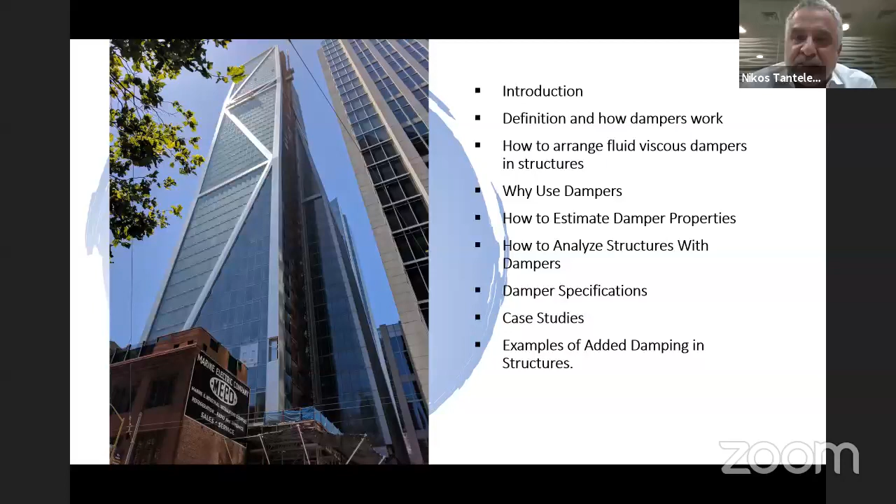Then we'll talk a little bit about specifying dampers, how dampers are generally specified on a project, and then we will see some case studies.

Just before we start, a little bit about Taylor Devices. Taylor Devices is one of the pioneers of shock control and vibration in the world. They are based in the United States, in Buffalo, New York, and were founded in 1955. They are organized along three verticals: aerospace defense, industrial, and structural engineering. The technology we'll discuss today has its origins in the aerospace and defense industry.

First we'll see how dampers work. To make this abundantly clear, we are going to go a little bit in a somewhat convoluted path. First we'll see photos of what fluid viscous dampers are and how they work within a structural system.

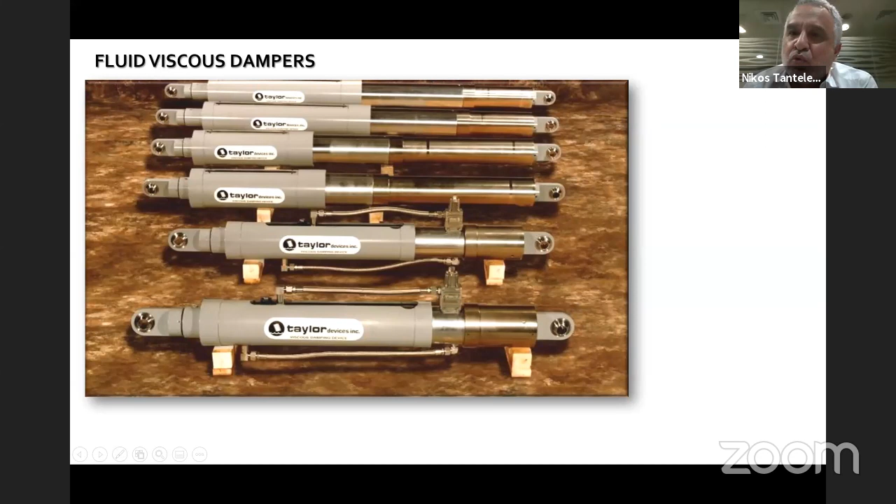Like they say, a picture is worth a thousand words. So this is a picture of what a fluid viscous damper looks like. It's basically a piston, a shock absorber, connected on the structure on two ends. It's a linear device which takes advantage of relative movement between the two ends it's connected to.

Now we're going into more detail. This is a cutout of a typical damper. As you can see, there is a piston, a piston head assembly which is perforated with orifices. Through the movement of the piston, driven by the relative deformation of the two structural points to which the damper is connected, fluid is displaced from one chamber to another. This achieves generation of a damping force.

You all remember your single degree of freedom dynamics model - it generates a damping force, which we will expand on later. It's worth noting that here we show a typical Clevis connection. There are other types of connections as well which can take care of irregularities in the connection or tolerance issues. I want you to note this green color thing, which is a cap and seal.

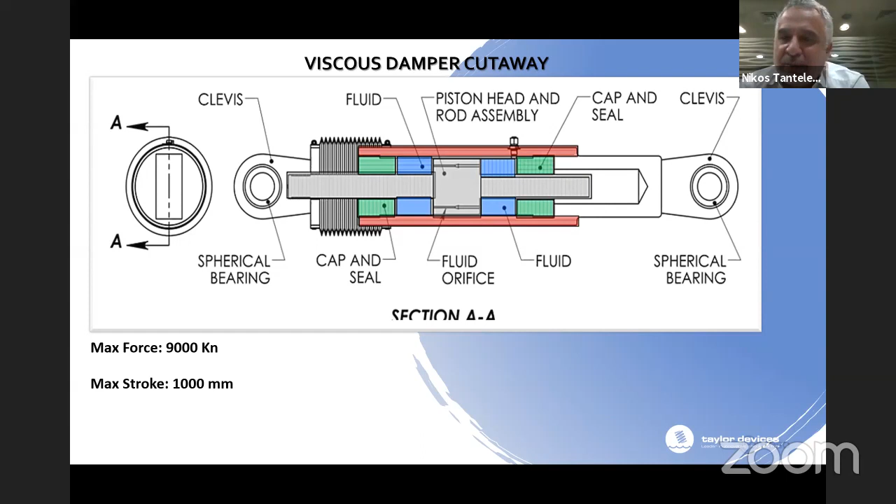This is a typical damper. The next one I'll show you is not typical, and I'll explain why. On a typical damper, these caps and seals are usually structural polymers, if you are talking about a good quality damper. Taylor Devices has patented structural polymers which are used in fluid viscous dampers. On this type of damper, the maximum force that can be generated is about 9,000 kilonewtons, and the maximum stroke is 1 meter.

This is very thin metal creating an accordion-like structure. This obviates the need for polymers or elastomers. This damper does not contain any synthetic elements - it's just metal. It was designed that way to be used; it was initially conceived for space applications, but now it's used for wind applications, because in wind applications we have many low amplitude cycles which create the need for reliability.

A structure will go through billions of cycles of wind vibrations in its lifetime, and this necessitates a system with reliability. Fluid metal bellows dampers are basically designed for infinite life. They are guaranteed for many years, 40 to 50 years - they are warranted and designed to basically last as long as the structure. But the maximum force here is limited to 2,500 kilonewtons and the stroke to 0.5 meter.

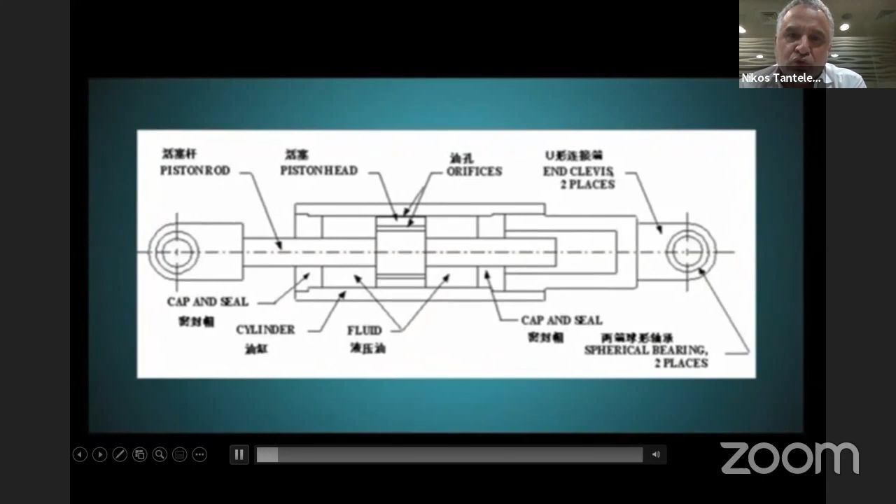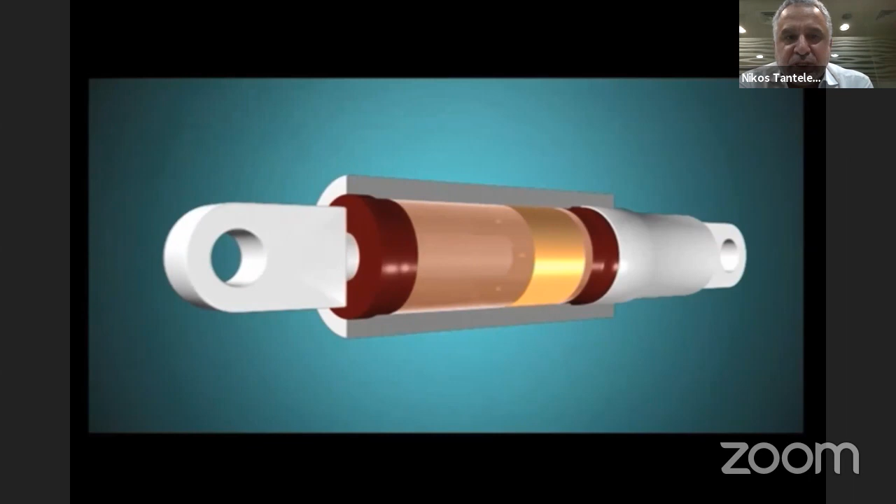Now I'll show you a video which makes what I described before clearer. You'll see the damper in operation. The movement you see comes from the structure - it's basically relative movement between two ends. Let's say between the top of a story and the bottom of a story, as you will see later.

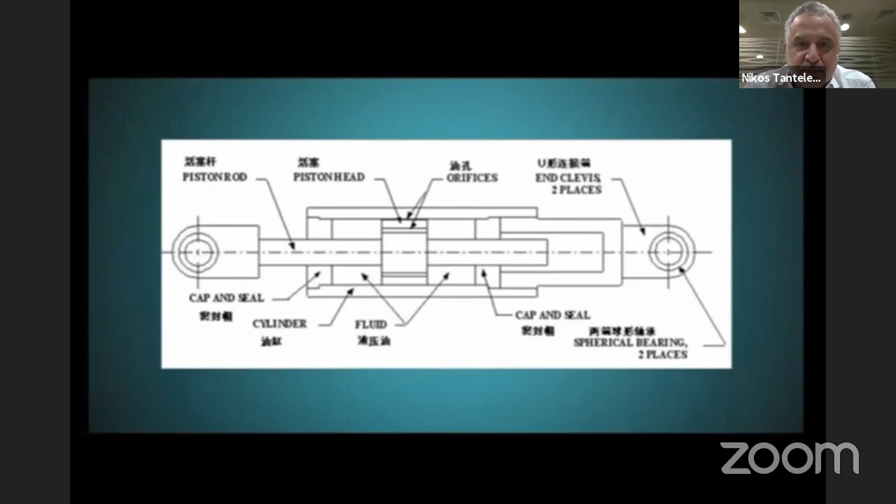Before we go further, we should describe what is a constitutive relationship for a damper. How does it work? We know visually how it works, but what parameters make it work? The basic constitutive relationship in simple terms for a damper is what you see here on the left.

The damper generates a damping force. This force is equal to a damping constant called C, which is characteristic of the damper. A damper is designed to have a specific C, a specific damping constant. It's also proportional to the velocity of the motion, which we'll see later, relating to the movement of the structure - basically the relative velocity between two ends raised to an exponent alpha.

Alpha can be set to any value from 0.3 to 2, but usually, and this is something we select from the beginning - this is also built into the damper through the damper's design - but it's something we select during the preliminary stage, on the basis of experience and certain special characteristics of the application.

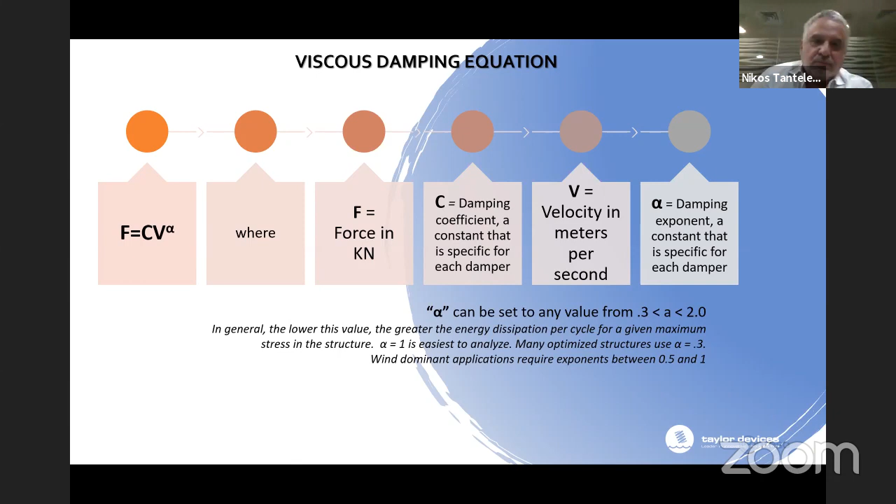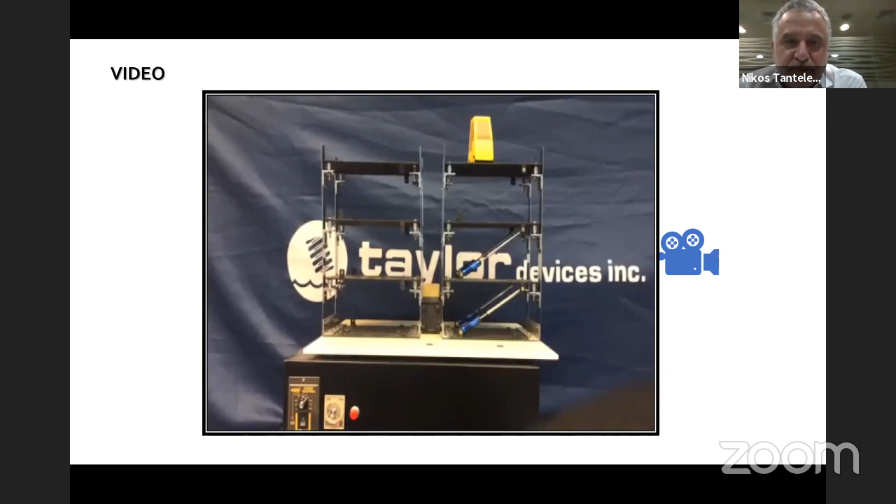Now we're going to look at how to arrange dampers in structures. This is a schematic that shows typical story arrangements. There are other types of arrangements which we will see later, but these are typically installed on bay frames and take advantage of the differential movement of the interstory drift.

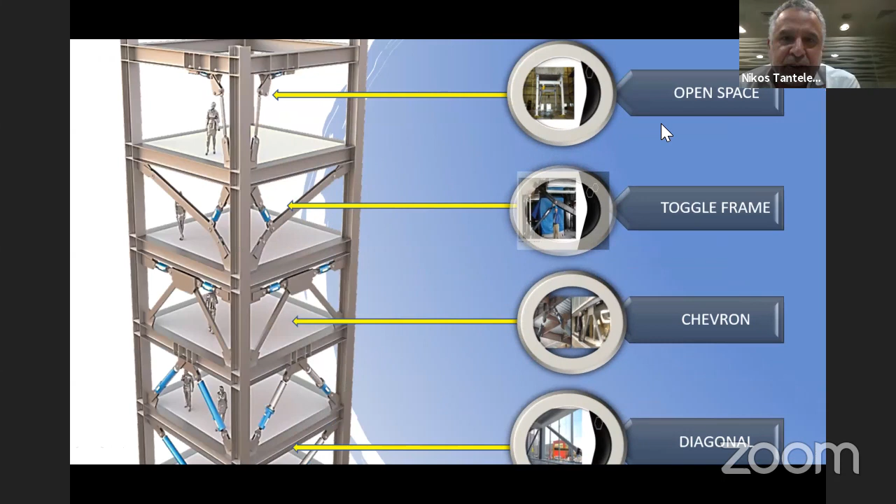One recent development is the toggle application, which has the benefit of being able to amplify movement. Basically, this kind of application multiplies the movement in the damper three times in relation to the differential displacement, the interstory drift.

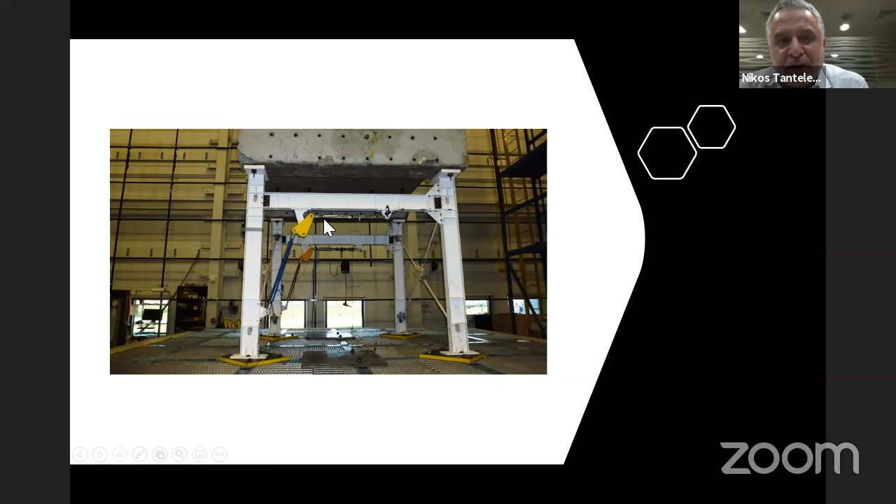This is the open space application. It's a new development which allows basically using the damper in a horizontal position, but without obstructing space. The one to the left is a double diagonal arrangement.

And this also has a different magnification factor, which we'll see later. Basically, the movement in the damper here will be the interstory drift times cosine of the angle theta of the incline of the damper.

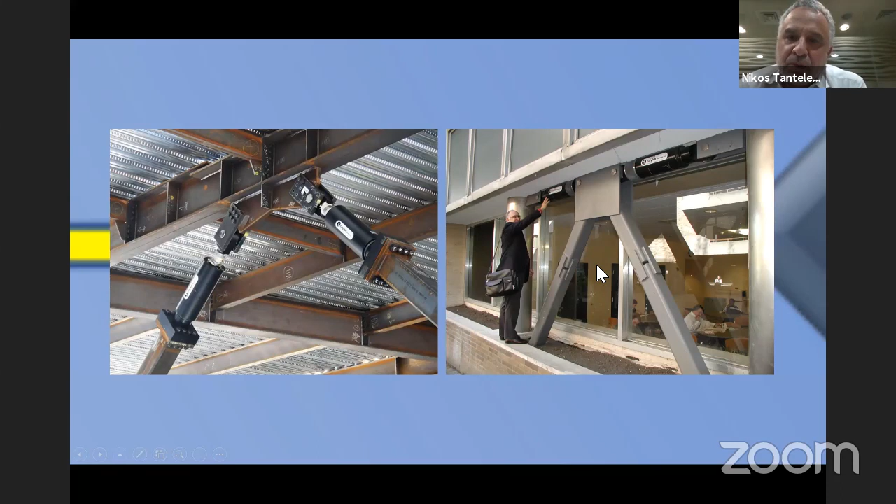This is called the chevron arrangement. Here to the right, where the gentleman is standing precariously, is the chevron arrangement, and this has a magnification factor of 1, i.e. the movement in the damper is the same as the interstory drift. And this is a classical diagonal arrangement.

This is another application. Sometimes dampers are used in conjunction with base isolation, in addition to lengthening the period of the building with the base isolators, to also impart substantial amounts of damping. This is used in highly seismic areas like California or Latin America.

This is called the mega brace configuration. If you look at the schematic on the left, the rendering, basically this is a configuration whereby the dampers are placed along a long external brace. We'll see a case study later where the brace traverses 20 floors and basically makes

up the lateral system of the building. The advantage of that is being able to collect movement over multiple floors and thereby optimize the behavior of the damper. This system has been used in a few very notable applications, like 181 Fremont Street in San Francisco, California, which we will examine later, and the Torre Mayor building in Mexico.

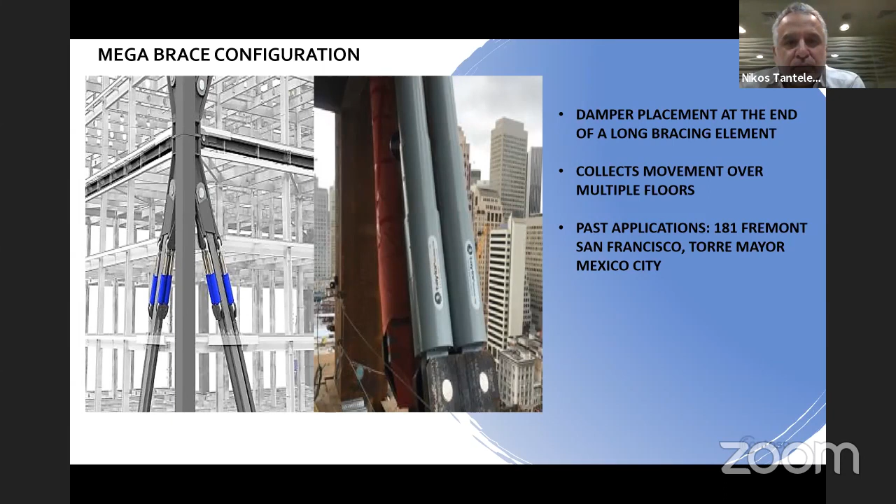And I think the most important configuration for our area, where we have basically wind dominant applications in high-rise buildings, is the damped outrigger. The outrigger system is a well-known system to structural engineers, and it basically consists of connecting the core, as you very well know, to the perimeter frame through a stiff member or system of stiff members to transfer moment, to convert moment into compression, to avoid dishing and to reduce the moment of the core.

Here, what we do is we decouple the outrigger from the column. It's no longer a stiff arrangement, it's just a lever arm, which transfers the relative movement between the core and the perimeter into the damper. It's ideal for high-rise buildings that have mechanical floors, where you can have these arms, like an outrigger, though it's not really an outrigger, to operate in that way.

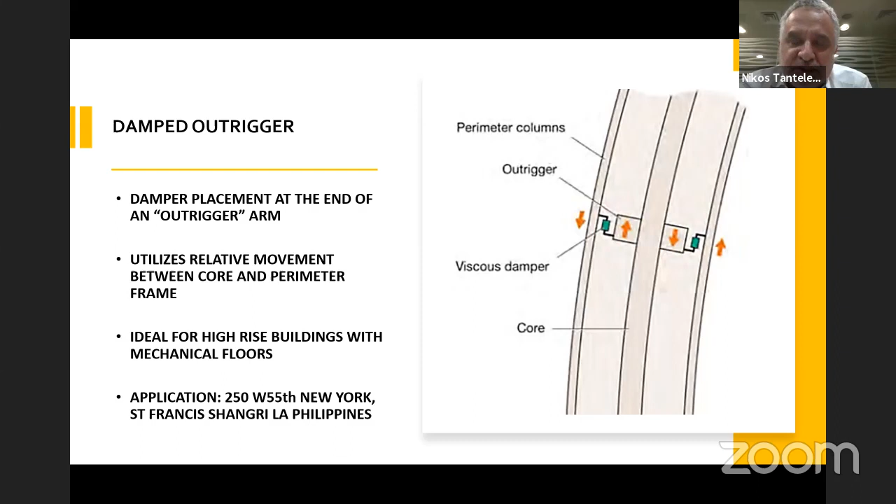Typical applications of that are 250 West 55th in New York, a 40-story building, which you will see later, and the St. Francis Shangri-La in the Philippines.

This is a close-up, a better representation of the damped outrigger. You see the core here. You see the outriggers, and you see the outrigger-to-column damped connection.

And this is what the actual connection looks like. On the left, you have a perimeter column. On the right, this is the edge of your outrigger, which is outrigger in quotes - it doesn't work as an outrigger, it's just a lever arm. In the middle, you have the damper, which is connected to both members. Here you see the typical bracketed connection.

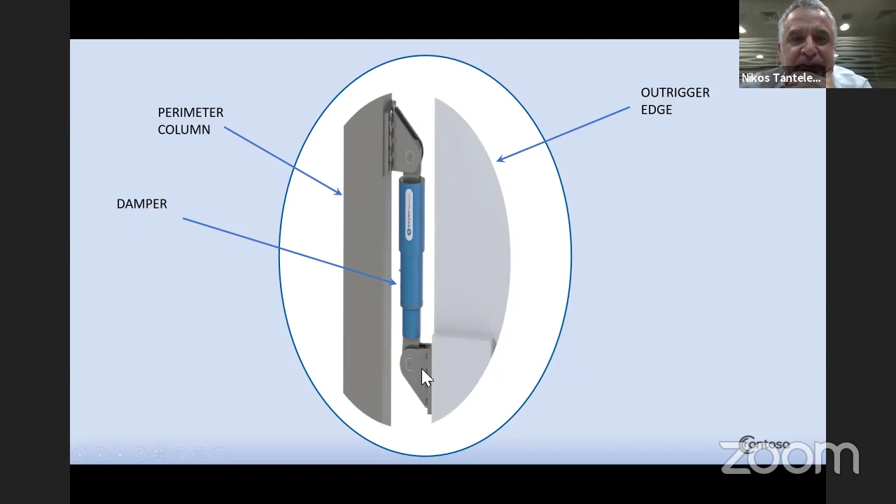So now we have to see why you use fluid viscous dampers. So the fundamental questions to answer in this discussion are two fundamental questions. Why do we need supplementary damping? Because this is what dampers give us. And if we need supplementary damping, why use fluid viscous dampers in particular? So we will attempt to answer these questions.

Just a few central ideas that are going to be pervasive through this discussion. For a damper to be a useful addition to our arsenal, we have to have two things. We have to have dynamic response, because this is how a damper works. And we have to find points that have substantial relative movement, when I say substantial, it depends on the application. For wind, it could be 5 or 10 millimeters. A substantial relative movement, which we can connect the damper to those two points, and have the damper operating efficiently.

And obviously we'll reinforce the idea, which I'm sure all of you know, that when we have to deal with dynamic response, we have two options. We can either stiffen the structure or dampen the structure. Dampers can be used for both SLS, drift, acceleration, or to reduce strength demands. But we can optimize for one. It will help the other as well, but the optimization has to be on one of the two categories.

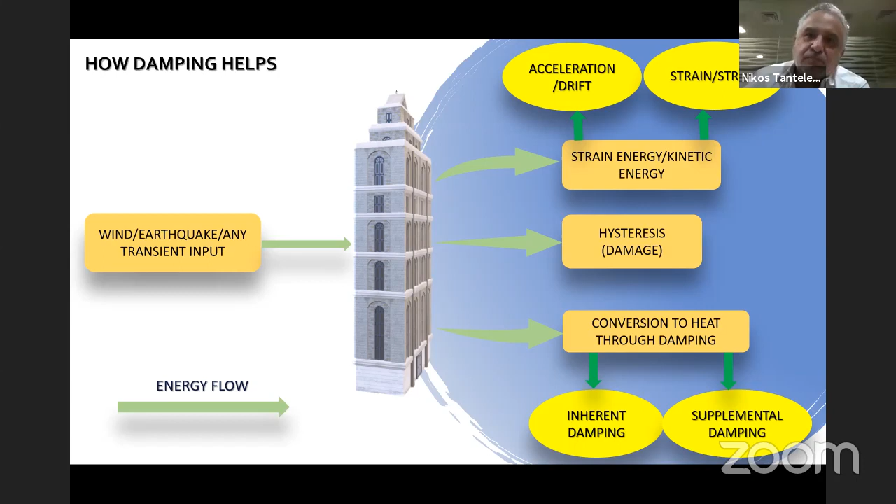Okay, so since we have two major sources of dynamic input, of course we have others as well. We have blast, we have many others. But the two major ones are earthquake and wind. So I thought to answer the question of why we need damping through these particular categories.

In the first picture here, we see a typical family of response spectra for earthquake. And these response spectra are obviously not smoothed out design spectra, they are spectra generated by a specific ground motion. But you can see the obvious, which is basically stated in codes as well, in the ASCE code chapter 18, where you have response reduction factors. And the fact is that with damping, you reduce the spectral responses of the structure.

You will see here that, for example, at a period of 0.5 seconds with 5% damping, you have almost an acceleration of 1.2g. And if we go down this curve, at 0.5 seconds with 40% damping, your spectral acceleration has dropped to 0.4g. So this behavior speaks for itself, it's basically that damping reduces dynamic response.

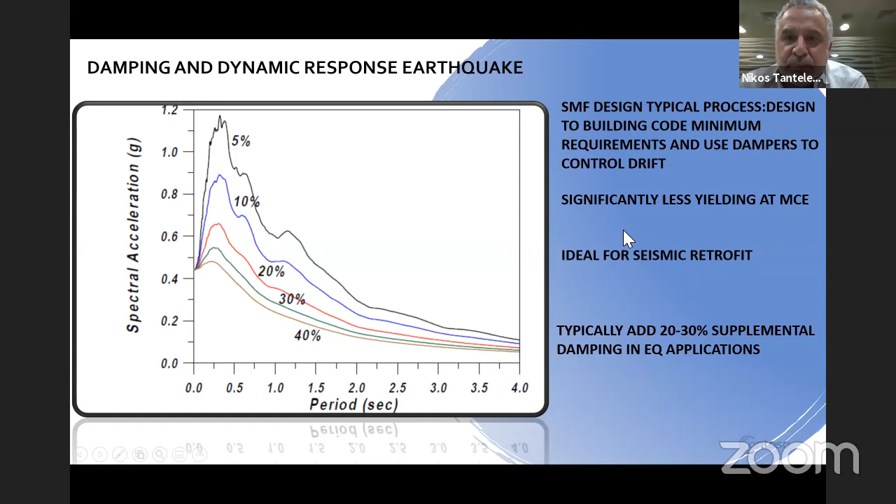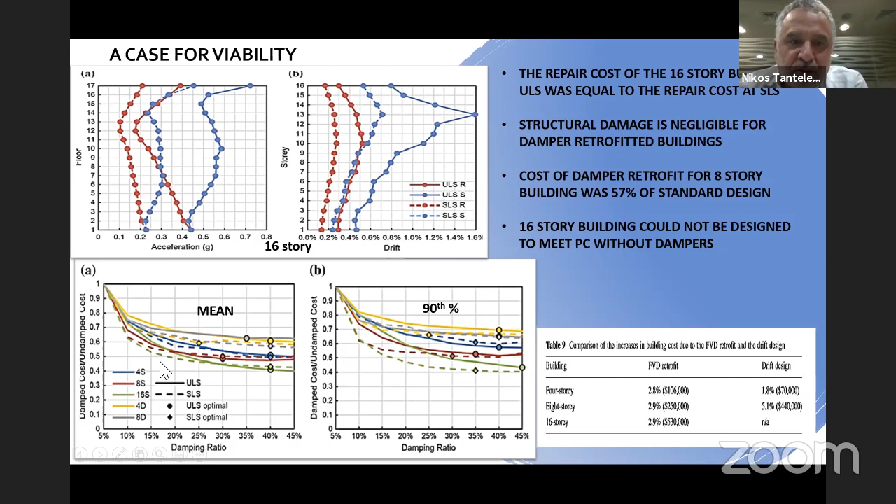But if we look at the corollary, if we allow for the same deflection, same drift, same behavior, that means you can reduce the stiffness of the building and have the same identical behavior as a building that is undamped.

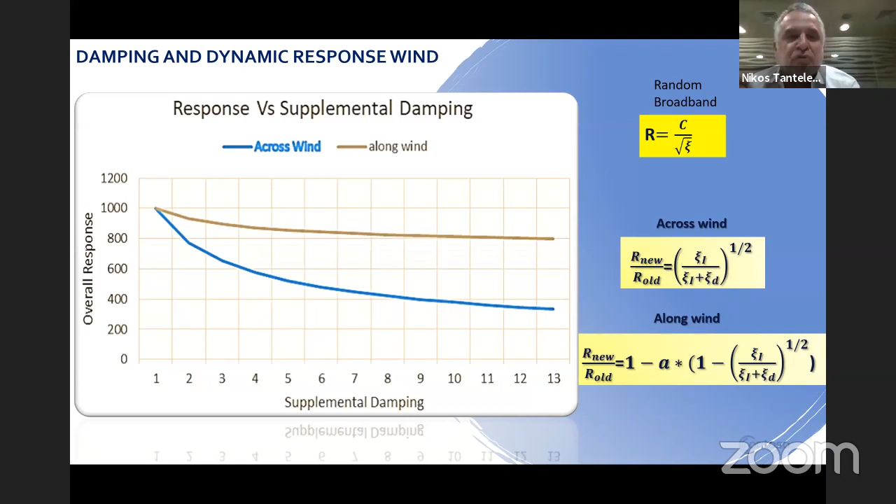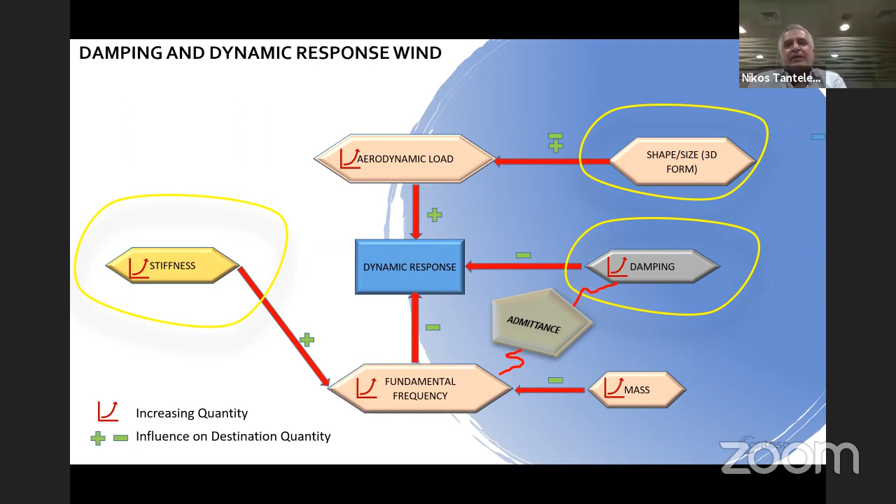That's another schematic just to drive the point home, regarding damping and dynamic response in wind. Once we have a given shape and size, the 3D form of the building, which also determines the dynamic behavior, we have basically decided and determined the aerodynamic load. Once we have this aerodynamic load, the question is how will the structure respond to it? The things that will influence the dynamic response are stiffness and damping. With increasing damping, we reduce the dynamic response. With increasing stiffness, we again reduce the dynamic response by increasing the fundamental frequency.

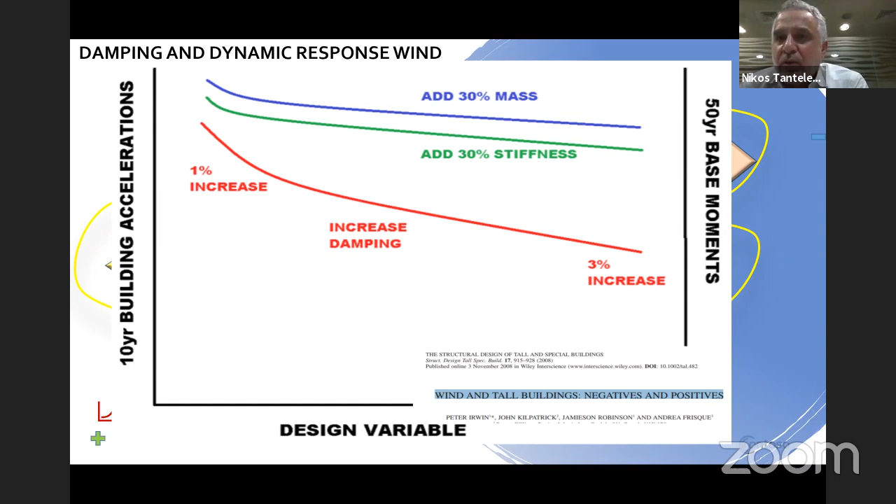I was asked a question: when is it inevitable to use damping? The answer is, you can always add stiffness, but stiffness means money. It means interfering with the elegance. And as you can see, the response reduction is not as sensitive to stiffness as it is to damping, which shows you that it's a more efficient way of taking care of dynamic response.

So in summary, now let's talk about why we need damping, and why we need fluid viscous dampers to give us this damping. They have several advantages, and that was the basis of our discussion so far.

It enables slender structures by dissipating energy in a predictable manner. The fact that it's a distributed system, you have a number of dampers distributed in the structure, creates redundancy. This allows the engineer to benefit from reductions in strength demand, so use it at ULS, not only to reduce acceleration or drift. They are easy to install.

Connections are straightforward. They are codified, included in international codes, the Chinese code, ASCE 7-16, and now there is a new ASCE pre-standard for design. There is an abundance of research, thousands and thousands of pages printed on fluid viscous dampers since the 1990s. They are very well understood and proven in 700 structures around the world.

And they are not dependent on frequency and temperature. The damped frequency of a building is related to the undamped frequency through damping, but the difference is minuscule. The most important benefit is that they behave out of phase.

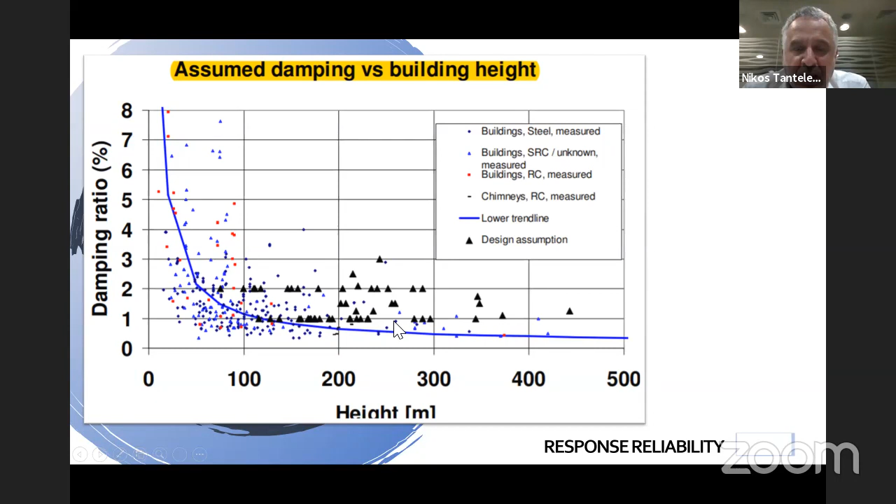You can see measured data for the same height and type of building that differ, and you can see how the design assumptions, denoted by this black triangle, differ from the actual measurement. What does this mean? Let's see.

This is just a small comparison. Let's say we have a structure which has no dampers and relies on inherent damping, and we assume the inherent damping is 1.5%. The actual damping is 0.75%. That means the dynamic response of that structure will be 42% higher than predicted.

The same structure, if we fit dampers to it, we assume an inherent damping of 1.5%, have an actual of 0.75%, and add supplementary damping of 5%, which is actually measured and verified. The difference in response will be only 11%.

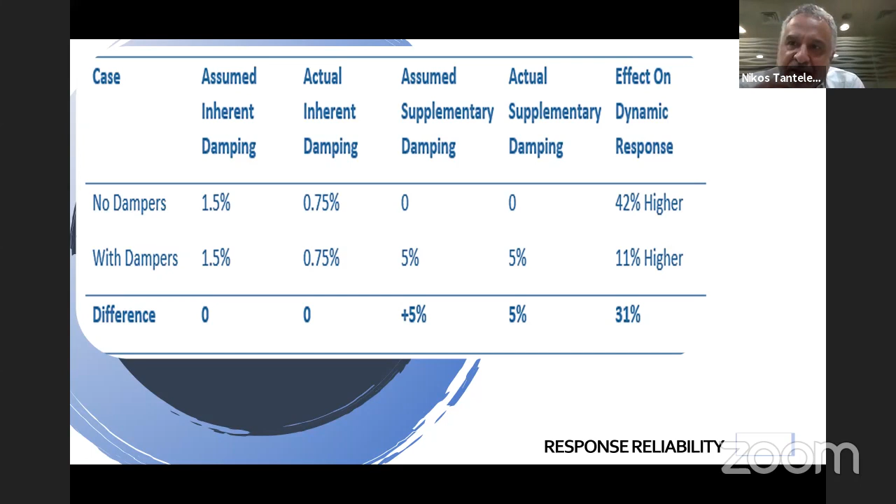So this is a very important point to note: by adding defined, measured sources of damping, we improve the reliability in this regard, because inherent damping assumptions are always suspect, since good quality damping data are not very abundant.

Now we go and discuss modeling, analysis, and property estimation. Just a brief on the analysis process, just to show that there isn't really anything much to worry about.

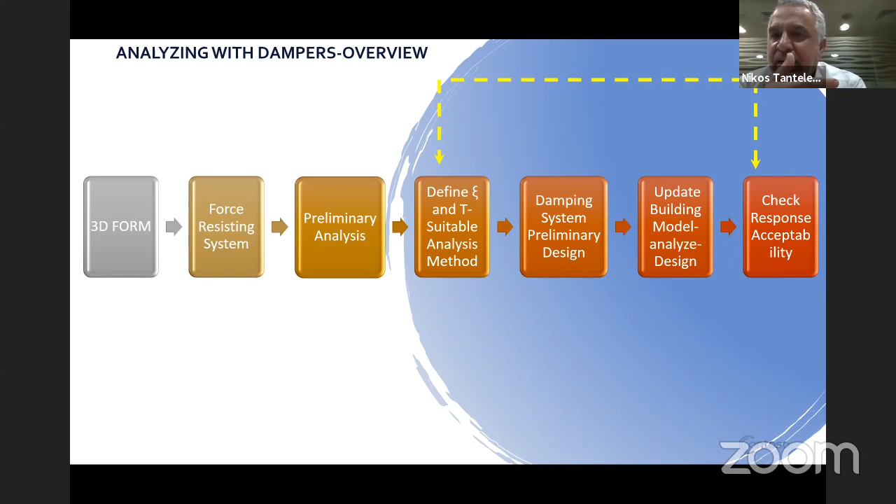We've defined our 3D form of the building, we select our force resisting system, do preliminary analysis, and now we have to define what is damping and period and suitable analysis method. Then we do a preliminary design of the damping system, update the building model, analyze, design, and check the response acceptability. We'll see these things in detail now.

A little bit more drilling down. The estimation of damper properties, which you will see in a little bit more detail very soon, is a very straightforward process. Basically, it involves doing a straightforward modal analysis and using a spreadsheet for post-processing.

Now, how to incorporate dampers in the model and analyze: if we are using a linear or static method, we have to account for damping implicitly and then verify it using basically an impulse load and the logarithmic decrement method. Or we can use time history analysis, a method like FNA, fast nonlinear analysis, which is very convenient, suitable for fluid viscous dampers, and very fast. We can do the analysis and basically verification within the analysis itself, so the model will account for the dampers itself.

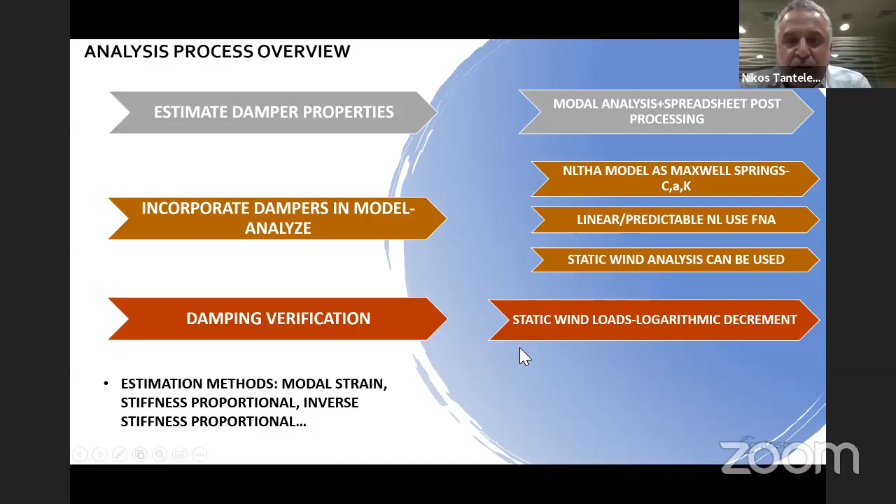There are many ways to estimate damping properties initially, but we will focus on one method called the modal strain energy method, which is described in ASCE 7 as well. Basically, very simply, the damping is the ratio of the work, the energy done by the dampers divided by 4 pi times the sum of the elastic energy of the building.

So basically what we have to do is set our target damping and calculate the energy basically consumed by, and dissipated by, the dampers, and divide by the elastic energy of the building. We'll see very soon how this is done in detail.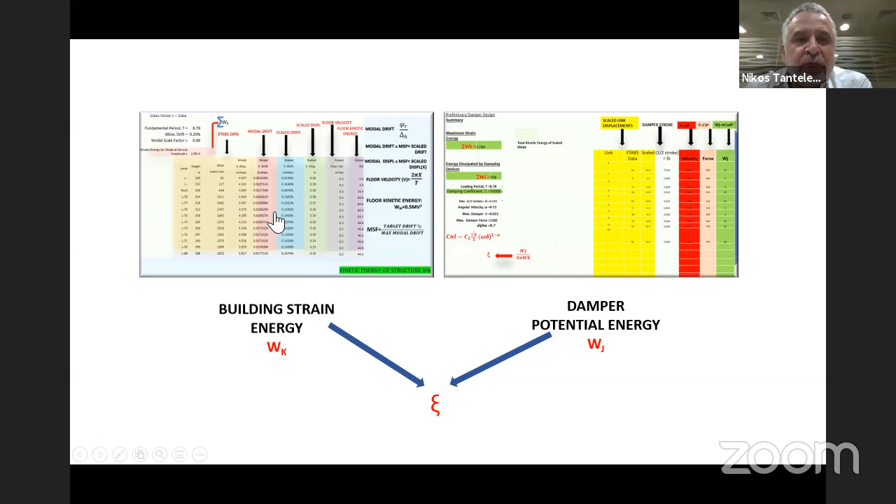To the left in brown is the ETABS data, and we have the modal displacement, which we then scale using the target drift divided by the maximum modal drift. Target drift can be anything—it's your target. It can be the drift that is the limit prescribed by the code, H/500, or it can be the drift created by your ULS force system.

Then this is going to be scaled appropriately, and we are going to end up calculating the kinetic energy. We calculate the floor velocity very simply by taking the displacement and dividing by the period times 2 pi, and then we calculate the kinetic energy of the floor. The sum of that is the total kinetic energy of the structure, which we sum up here.

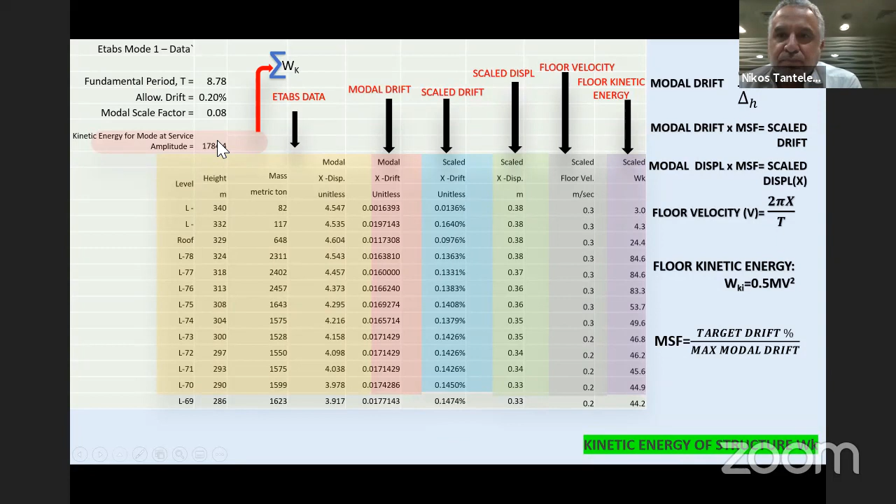In a similar manner, we do the same for the energy of the dampers. These are the ETABS data, scaled—this is the stroke of the damper. The velocity is basically the angular frequency times the stroke, and the force, and then using the formula we showed before, we calculate the energy of the damper.

And this is our damping here—the strain energy of the dampers, which we calculate in this spreadsheet, divided by 4 pi times the strain energy of the building, which we calculated before. This is a typical method of how to obtain the damping, and we use this to calculate the damping coefficient by basically using a simple iteration with goal-seek on Excel.

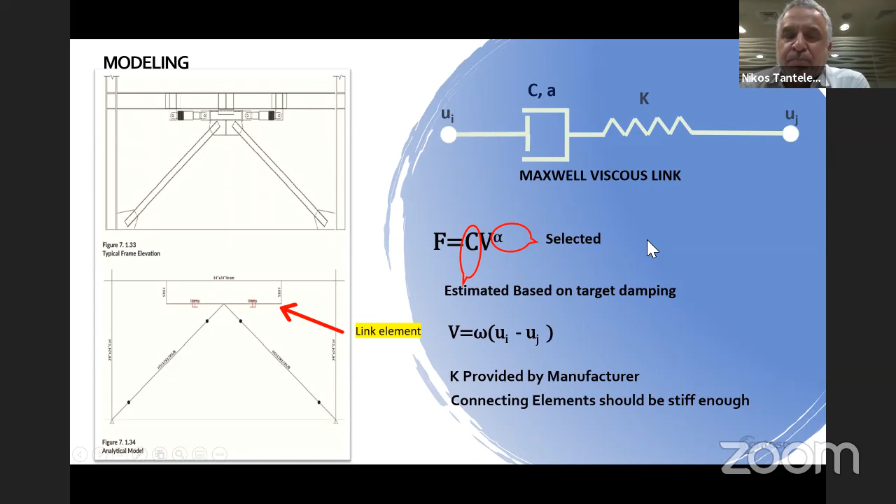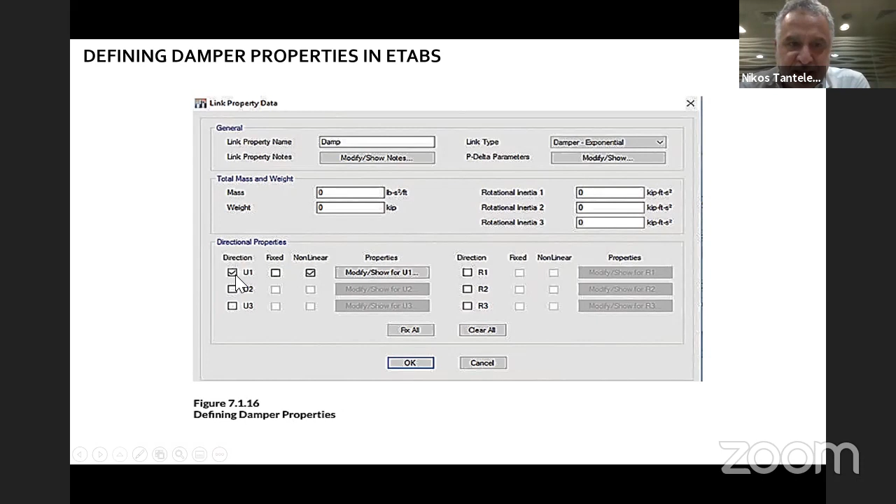This is what we input in the model—a screenshot from ETABS. This is the first screen: we select damper exponential, and we restrain the axial, since it's an axial element. Then we go to the second screen, where we can input the stiffness, which will be provided—it's not static stiffness, it represents the flexibility of the fluid column—the damping coefficient, and the damping exponent.

We could also use the effective properties if we are doing a response spectrum analysis or a linear modal analysis. In this case, the stiffness will be 0, and the effective damping will be the effective damping coefficient that we have used. But if we have cases with cross-coupling of modes, it wouldn't be recommended to do that. This is how we use implicit dampers without modeling the dampers in the model.

So a few words about the possible analysis methods. As you can see, all of the methods can be used, but for some of them we use damping implicitly by basically estimating how many dampers we need to provide a certain damping ratio to the structure, which we have seen how to do before, and using this number in our analysis. If we are doing a response spectrum analysis, we are going to reduce our spectrum using that number.

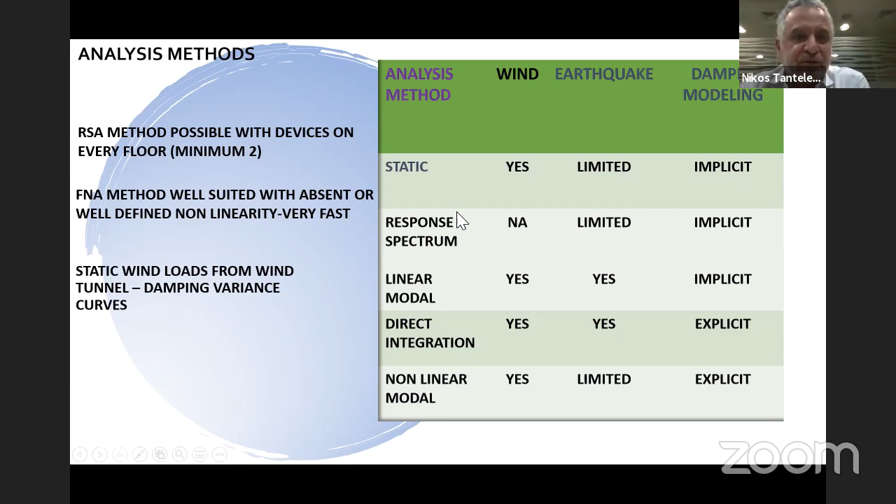Now for wind applications, if we are using a static analysis, a very important aspect is how to use the damping variance curves. When we do a wind tunnel test, we use high frequency force balance testing to generate data, then there is a desk study and we generate the so-called variance curves. These damping curves allow us to tune the properties of the structure and extract the actual static loads that we need to design for.

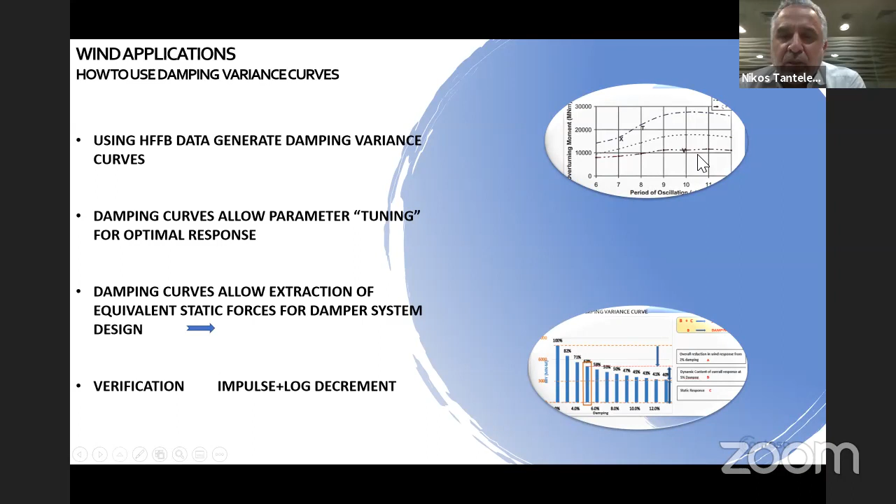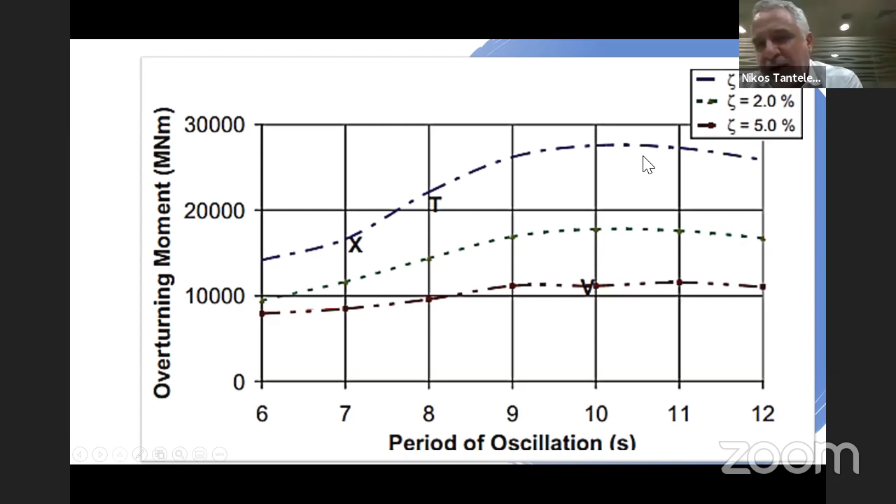This is a typical graph which shows oscillation versus overturning moment. We see that as the period increases, the moment increases as well, up to a plateau. This is a better example.

This is another damping variance curve which shows, once we have decided our frequency and what the period will be, how the structure behaves with damping. We see that this differential, denoted as A, is the overall response in wind, in moment in this case, from 2% damping to 5% damping, shown here.

The dynamic content of the overall response at 5% damping is shown here, this amount here. The static response is shown by the curve flattening as we go to higher damping, which indicates the response is static. So now we know that we have to design the structure for the sum of the remaining dynamic response and the static response, and design the damping system for the remaining dynamic response.

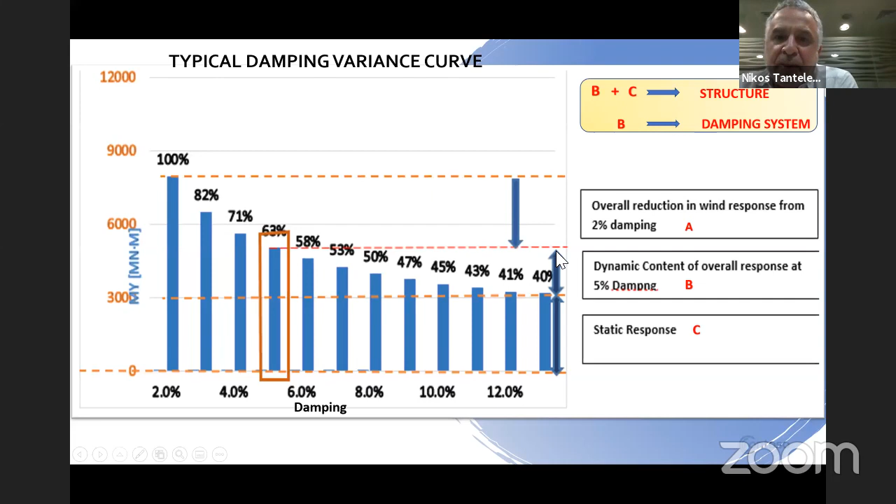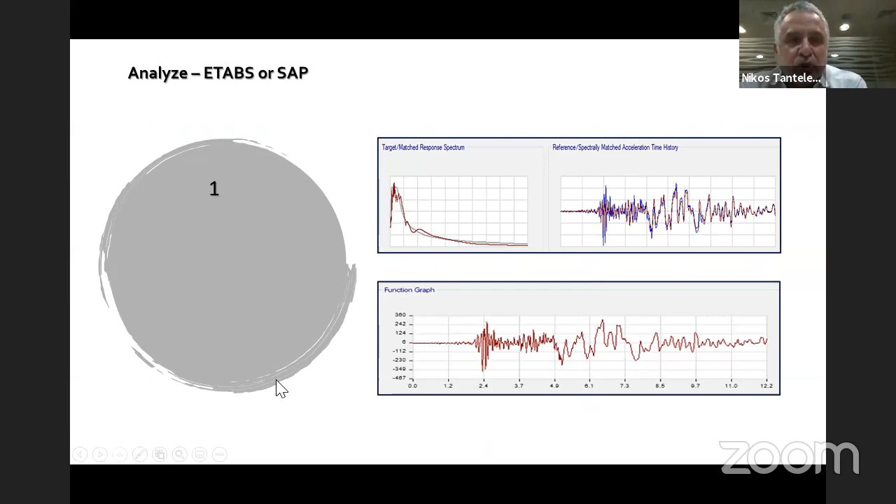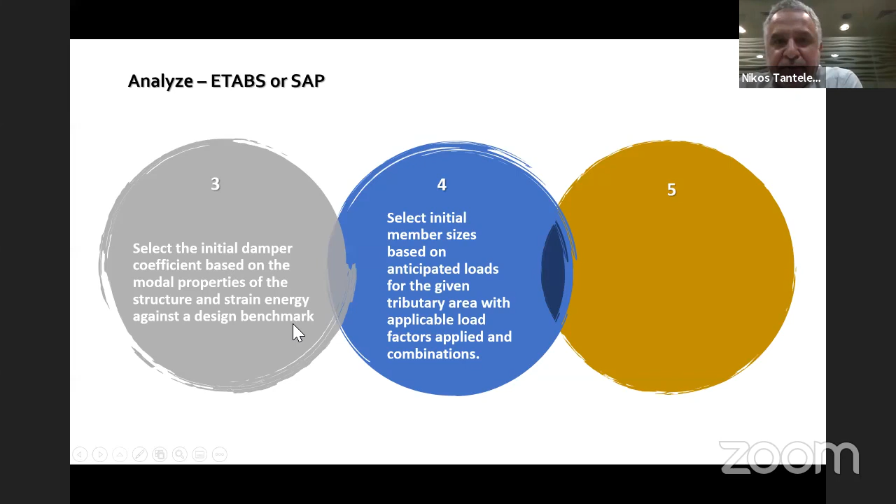So to recap how to analyze: we determine our inputs, which could be ground motion, wind tunnel time histories, or static forces. We generate a structural model. We do preliminary selection of dampers, damper coefficients, and sizes generally, initial sizing. Then we do the analysis as usual.

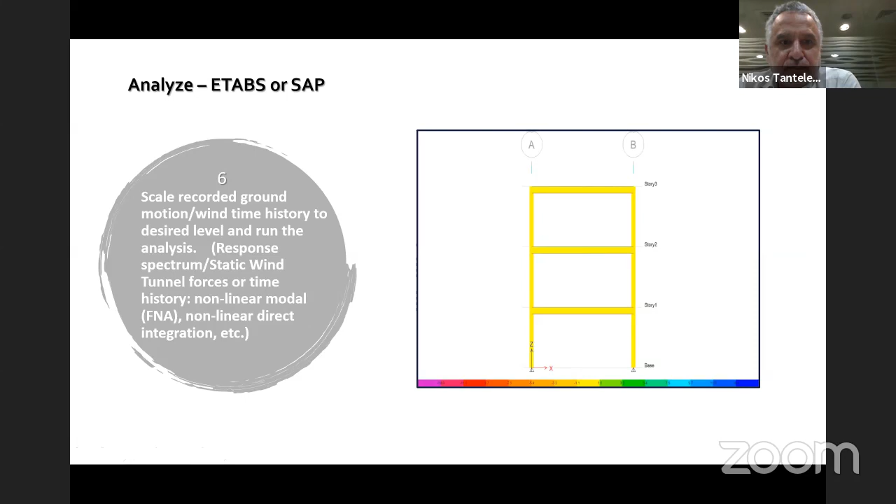Here is a comparison of two small frames. By adding dampers, we are actually reducing the demand capacity ratios, and we can utilize smaller members. This is a comparative response. See how much less stressed the damped structure is.

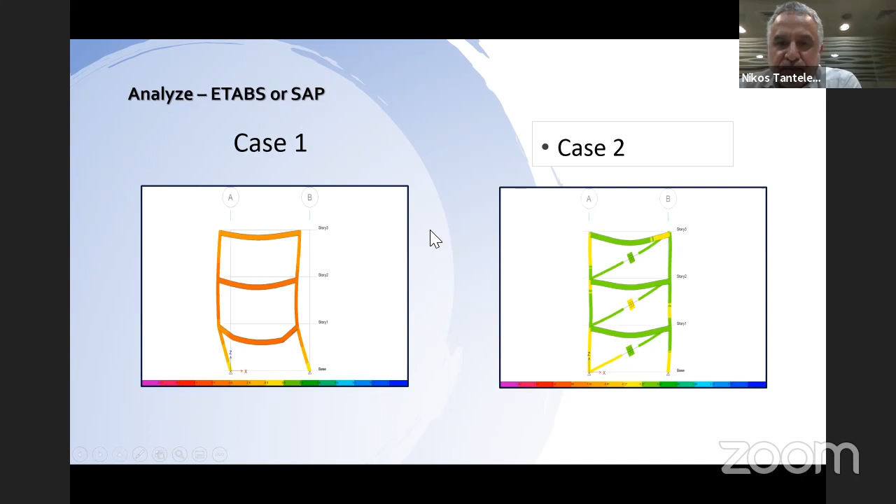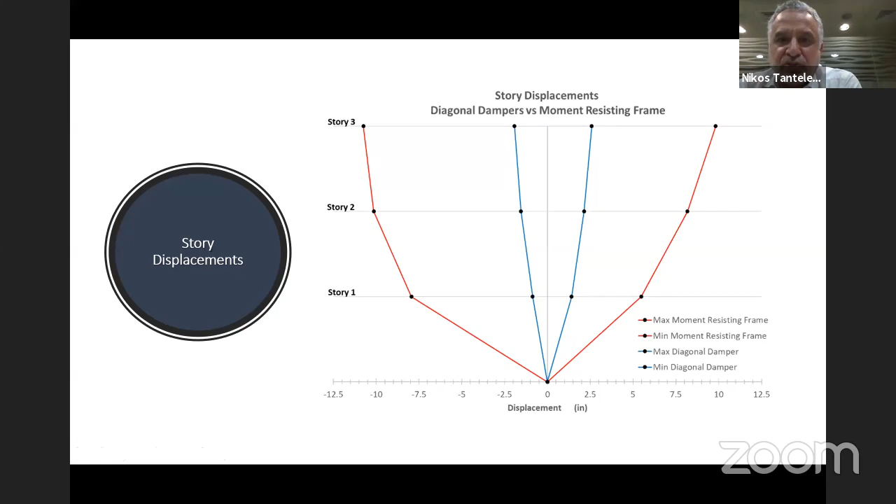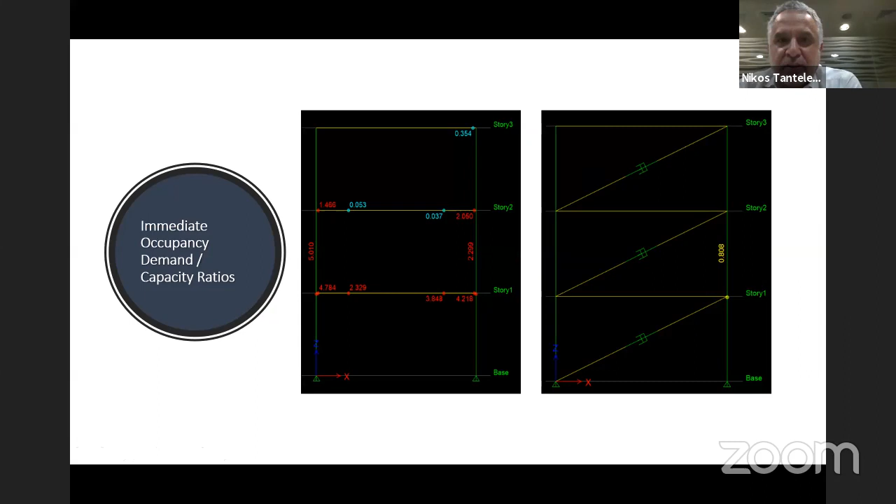This is a comparison between the two frames on story displacements. Again, you see the large difference. Relative story velocity, same comparison. This is the comparison of interstory drifts, and these are the demand capacity ratios. Same forces, you just see that you can reduce the strength demand, the acceleration, and the drift by just adding a little bit of damping.

And then we do an iteration to finalize our selection.

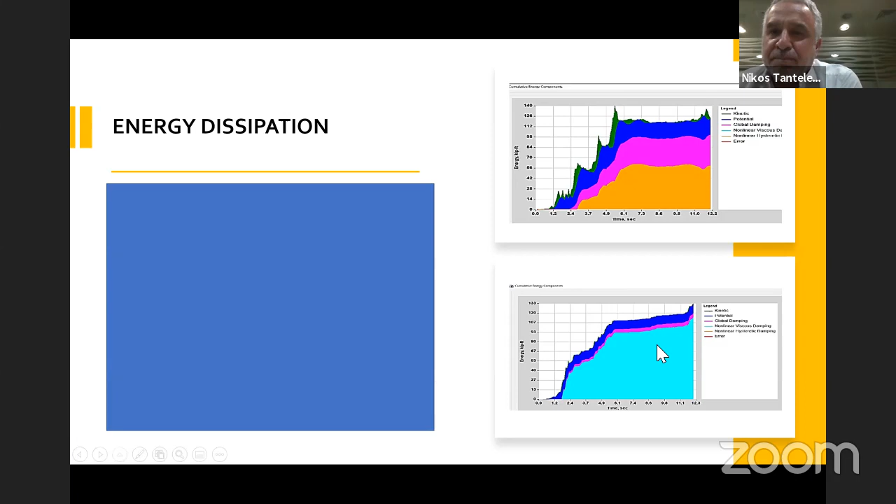A few words about the code provisions. Dampers are referenced in ASCE 7-10 and 7-16, chapter 18, referenced for testing and for earthquake applications. They are very well codified, not only in ASCE, but in many national codes, such as the New Zealand code, Canadian code, Chinese code, and so on.

To take full advantage of fluid viscous dampers, we have to use performance-based design, which can be done both for seismic and wind. For wind-dominant applications, we can use chapter 31, which deals with wind tunnel procedure, allowing reduction of the response under certain circumstances by 50%. We also use chapter 1.3, clause 1.3.1.3, which describes performance-based procedures. So performance-based procedures are allowed under ASCE 7-16 and have been used in buildings, some of which we'll see later.

For performance-based design procedures for seismic, we have FEMA P58 and many other local codes in the US, like the PEER in California and so on. There is a new ASCE pre-standard for performance-based design for wind, which references dampers specifically, and it's a very useful document. This is going to basically form the basis for replacing 7-16 in 2022.

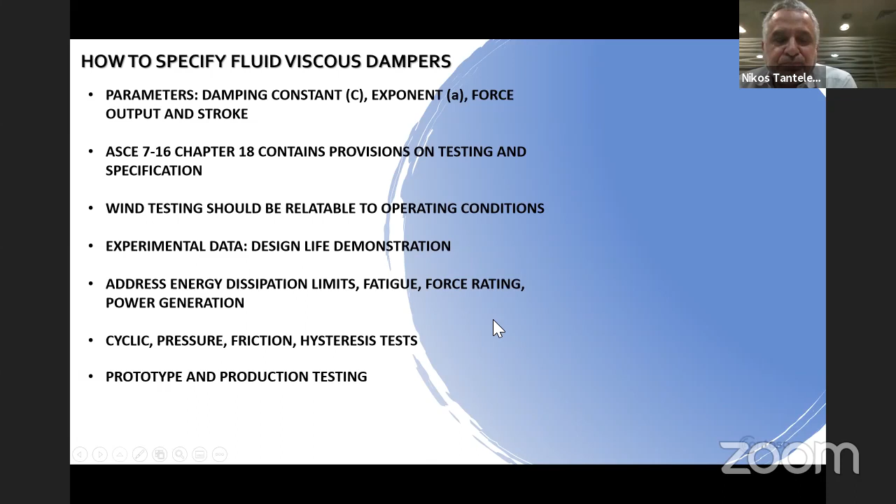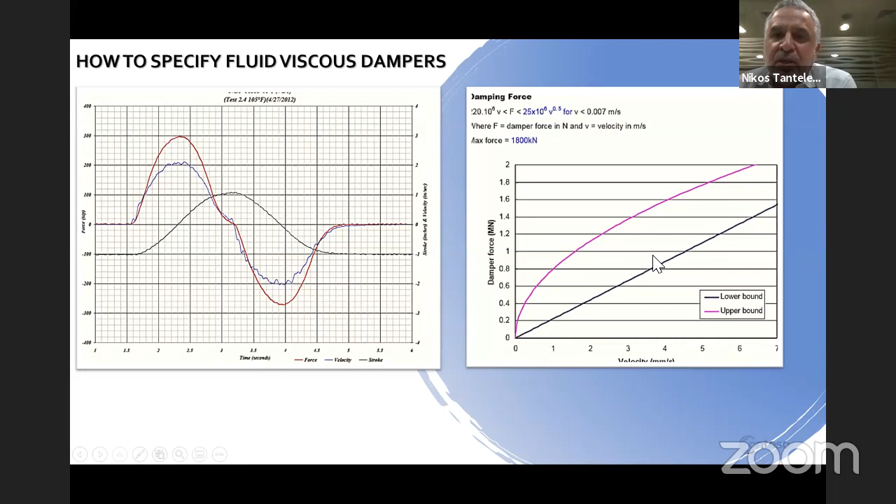Like we said before, the exponent parameter from 0.2 to 0.7 is good for seismic, and 0.7 to 1 is applicable to wind. At exponents around 2, we are talking about lock-up devices in bridges. The lower the exponent, the more efficient and fatter the loop, meaning more energy is dissipated in one cycle. But then you reach points of diminishing return, where you don't get any additional benefit. So when fatigue and power generation are not an issue, an optimal exponent for seismic is around 0.3.

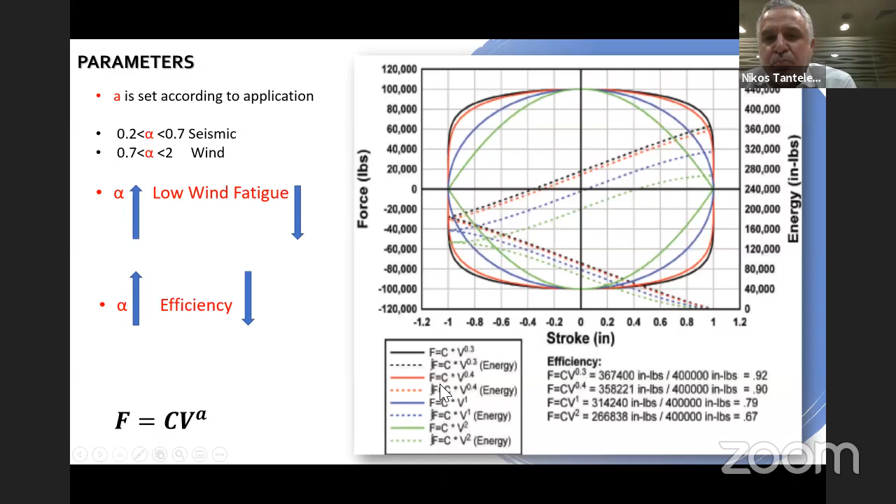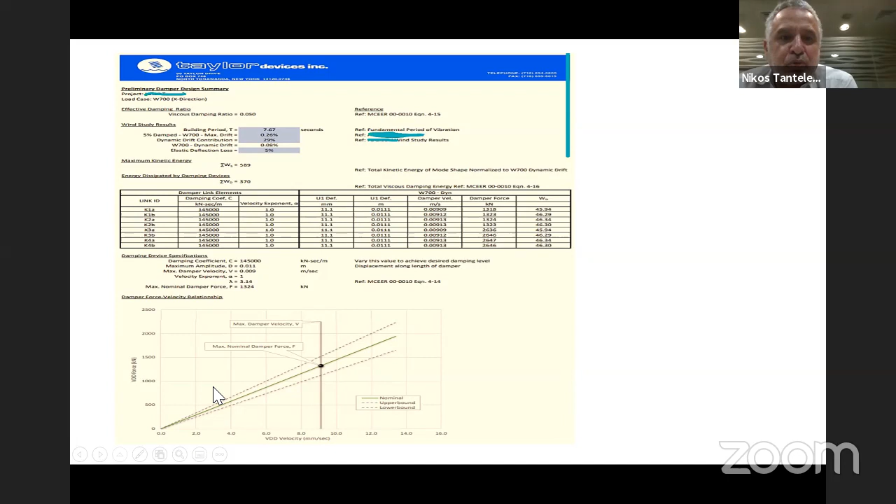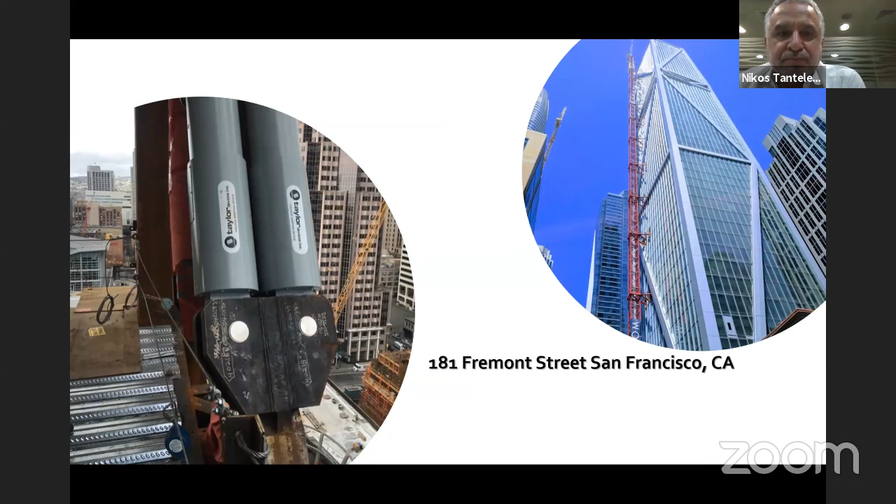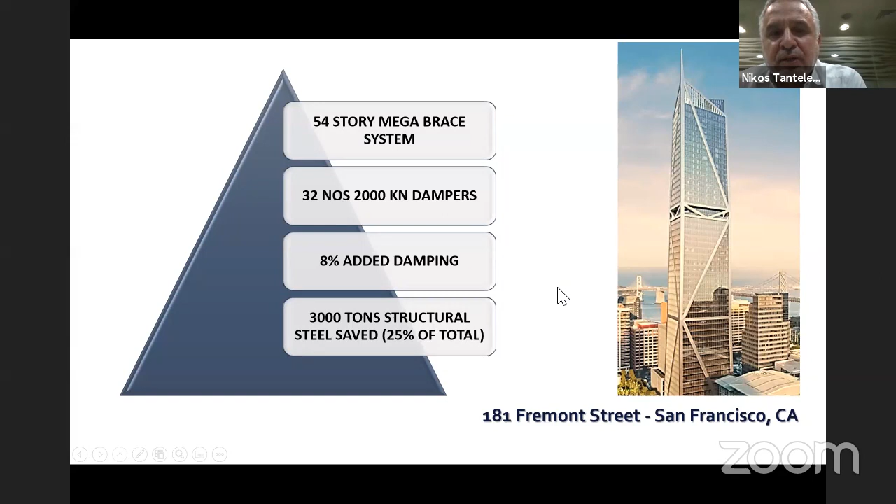Some examples: this is 181 Fremont Street, San Francisco, California. It's a 54-story mega brace system with 32 dampers, each outputting 2,000 kilonewtons, adding 8% to the damping of the building. This design was optimized for wind, but benefited earthquake performance also. The saving compared to a standard non-damped design was about 3,000 tons of structural steel, about 25% of the total.

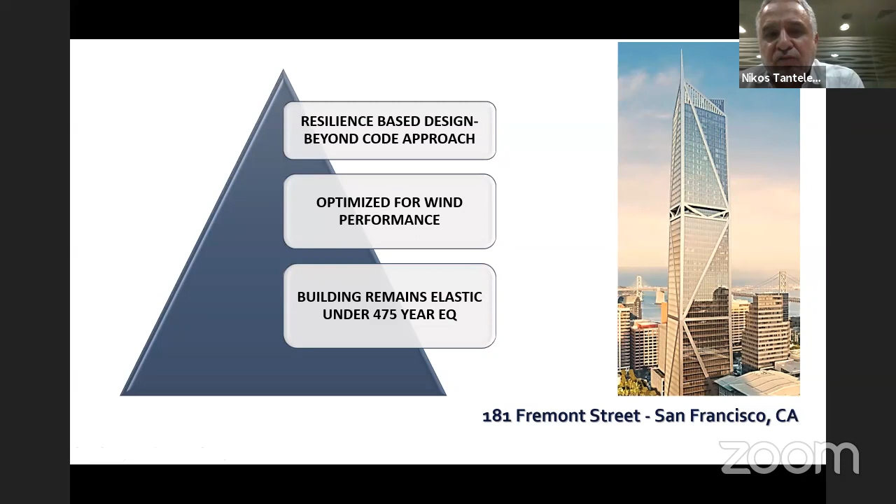This is one project in which we used the force limiting damper because we had a combination of earthquake and wind. The damper was bilinear: up to a certain velocity it behaved with a high exponent, and after a certain velocity a pressure valve system opened up the damper, reducing the force output by lowering the exponent.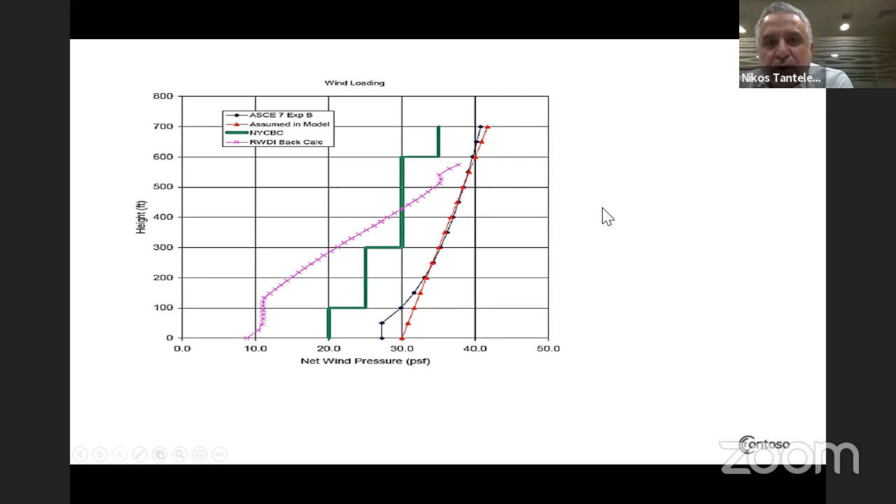This is basically the static wind forces as back calculated from the wind tunnel test. As you see, they are much lower than what were prescribed by the ASCE code and the New York City building code. And this is a frequency response function which was used in the analysis of this damping system in this building.

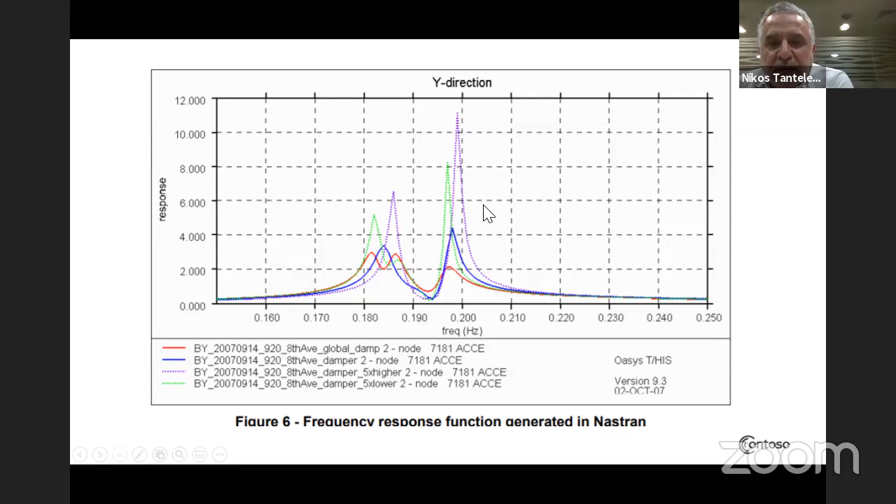Another case study is the San Diego Courthouse, 24 stories, special moment frame, 106 fluid dampers. They added 11% supplemental damping, and the rated force was from 1,500 kilonewtons to 2,000 kilonewtons. Here we see some schematics, the plan view, and here to the left is the elevation view, which shows the configuration of diagonal dampers. Typical placement was about 4 dampers per floor, sometimes 6 dampers.

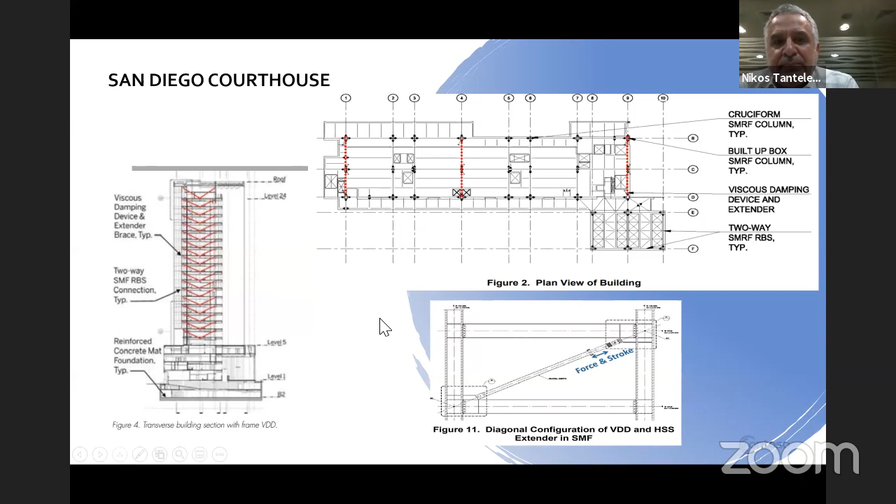Here we see the behavior on the interstory drift ratio: with inherent damping of 1.5%, we go to 0.3%, and then with 6% damping - we had 11% in this case - we go to our limits. These are the results from a 20-year return period wind in the transverse direction. As you can see in the top floors, if you compare the 6% damping to the 1.5% damping, you have a reduction of story force in the order of 35 to 45%.

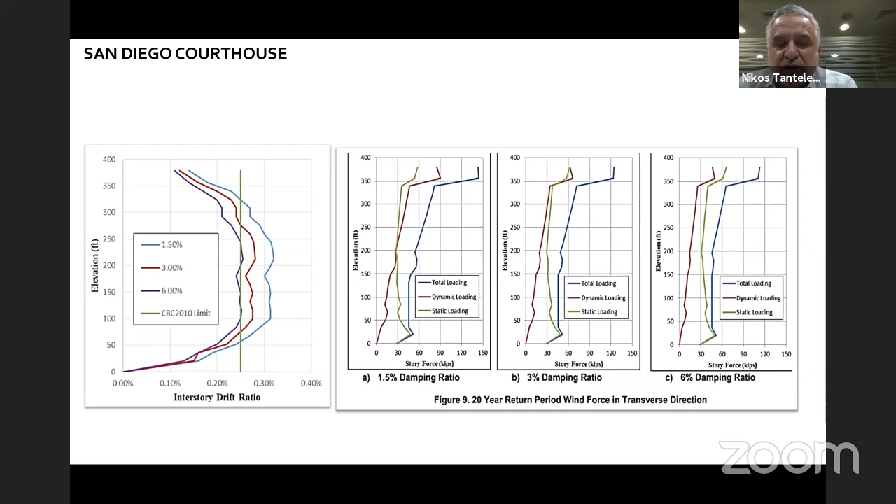This is a concluding slide - well, not the concluding slide, but it's just to put everything together. What I've described to you is not a new thing. Since 1991, Taylor Devices has installed 26,000 dampers in 25 countries on 700 structures. Some of these structures are very, very prominent, and you see them on your right. I want to stand on a specific one, which is the Millennium Bridge in London.

I'm standing on it for two reasons: because it's a famous case, and because we haven't talked about bridges. Basically, when this bridge was designed, there was a problem of acceleration because of lateral footfall. So the structure had to be fixed - there was excessive acceleration. The solution, which I believe Arup and Atkins came up with, was to install fluid viscous dampers, which basically reduced the acceleration from 0.25 G to 0.06 G.

As you can see, there are many prominent buildings incorporating this technology in the US, in China, in Taiwan, in Japan. Like I said, there are 700 structures in 25 countries.

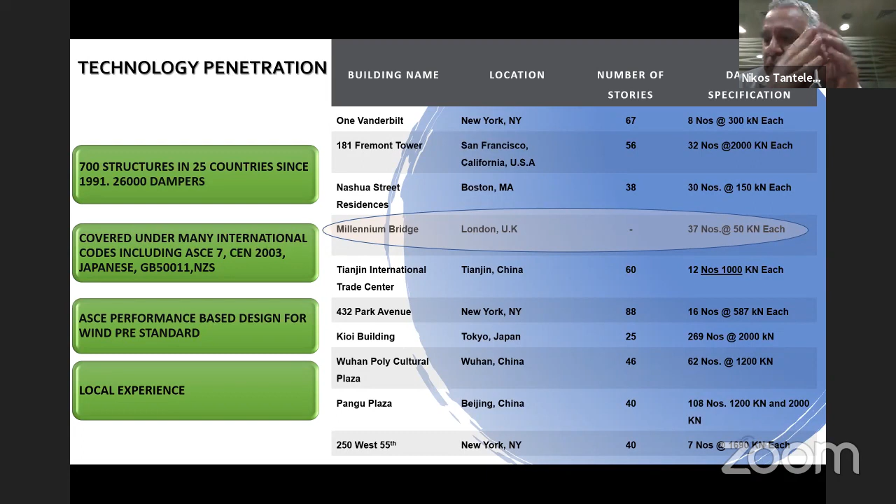I just wanted to note, in conclusion, that since we started promoting this technology in this area, we have test-drove it in two cases. I cannot say much - I will say that we used it in two projects with viscous dampers, and we also tested it on a project with NORR Consultants. I'm sure you can talk to the gentlemen, Mr. Michael Paschalis and Mr. Thuc Bui, and they will tell you what they think about the technology.

So in conclusion, it's a technology that grew from its military defense and aerospace roots, with all the strict design processes and investment that come with that. It found a home in civil engineering, and it has proven itself since approximately 1990 in our field. It's the only technology that can reduce stress and deflection at the same time, and it has many advantages while providing damping, the most efficient way to create an economical structure.

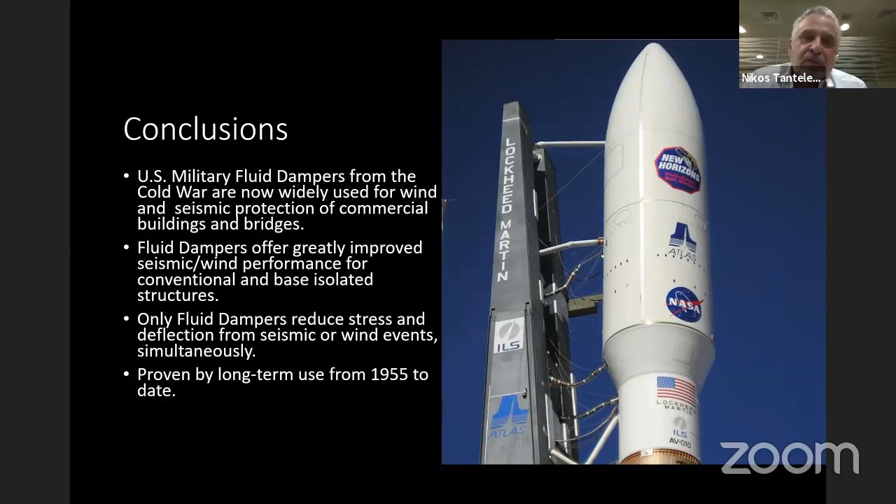Thank you. If you have any questions, we can go to questions now.

Thank you, Nikos. We have a few questions. You mentioned about UAE - did you use this technology in any projects? Did you employ it?

So the technology was tested on projects. I cannot say much - one project was already in construction, and the other project was also about to start construction, so there wasn't much scope, and another project was at tender stage. The technology performed very well. I'm sorry, I'm bound by non-disclosure agreements - I have the permission of the gentleman to say this much, I cannot say anything more.

One question is: when you use viscous dampers, it will reduce the stiffness of the building or outriggers - so how will the damping be beneficial? That's actually covered, but anyway, can you repeat that? Can I answer? Yeah, please.

Yes, that's an excellent question. Actually, this is one of the problems with thinking about it - it's a little bit counterintuitive. Let's think about it this way: you have a structure with an outrigger with stiffness K, and it deforms to some point, up to the limit.

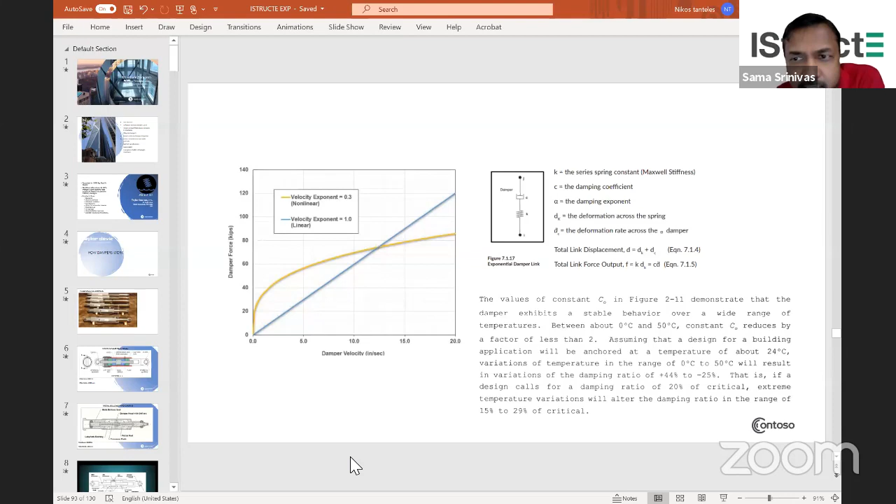Is Taylor Devices for blast resistant building design possible, where the pressure is 200 bar and above? That's an excellent question. In terms of the damper sustaining the pressure, the answer is yes.

There are studies on fluid viscous dampers used in blast design situations. You can get a benefit from the vibration component that comes after the blast wave, but if the blast wave itself is critical, fluid viscous dampers will not provide much benefit. There's an interesting paper on that analysis.

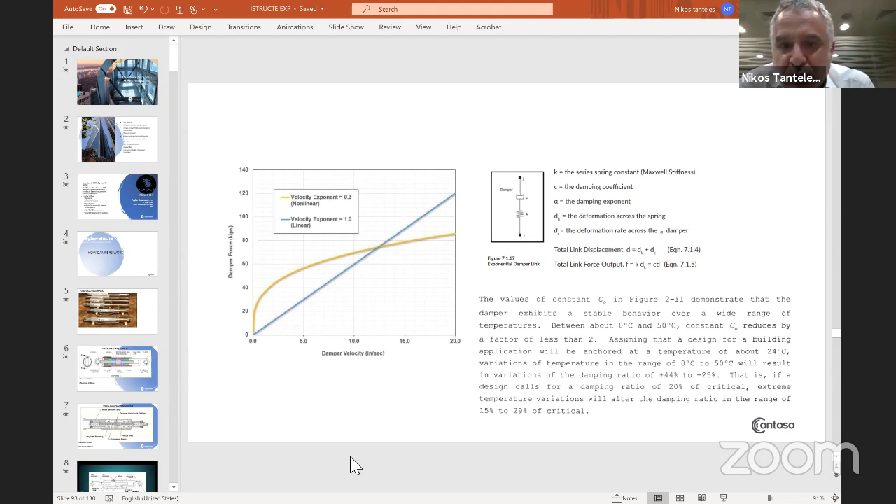I can send the paper to the gentleman if he wants. I think it's Mr. Hemant. You can share your email ID so they can contact you directly for further questions. This is my email ID.

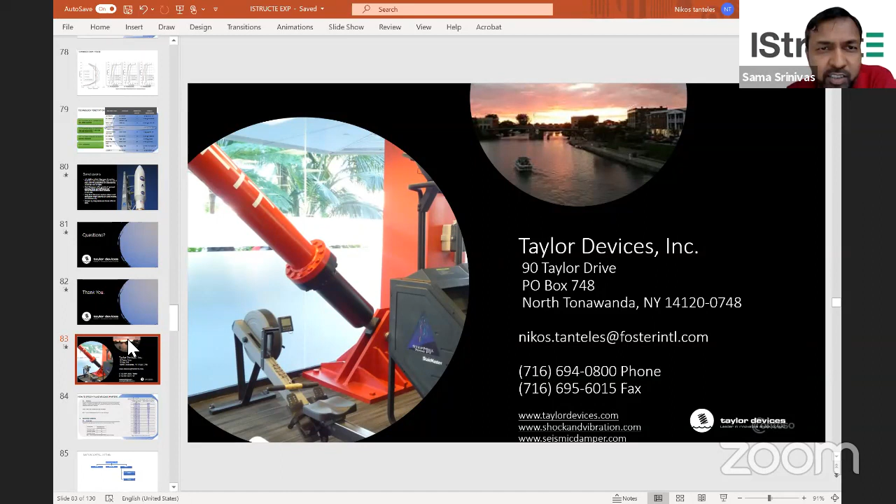I think the majority of questions are covered, one more last question. In one of your slides you mentioned using dampers resulted in a 57% materials reduction optimization. Did you have a practical approach for this, or is it based on certain conditions? No, I believe this is the one.

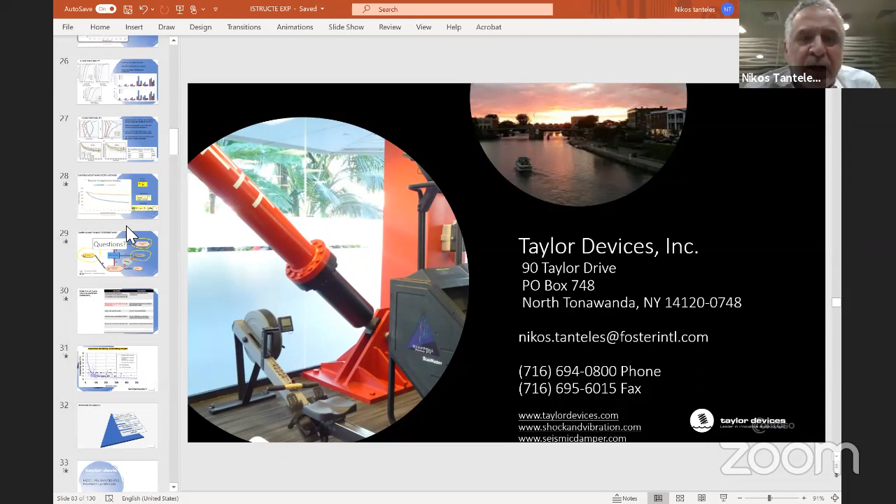Basically this is a case study that was done at Oxford University. I can share the paper with you immediately. It compares an 8-story building designed once without fluid viscous dampers to a maximum drift of 0.5% at SLS.

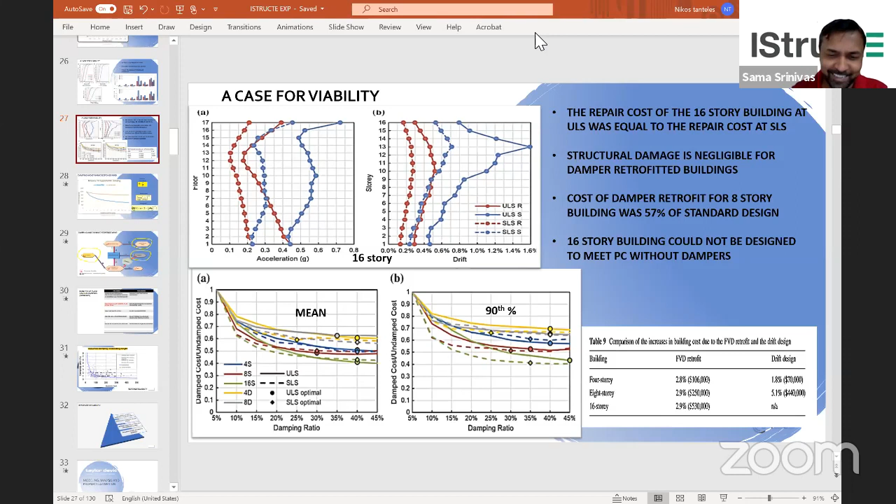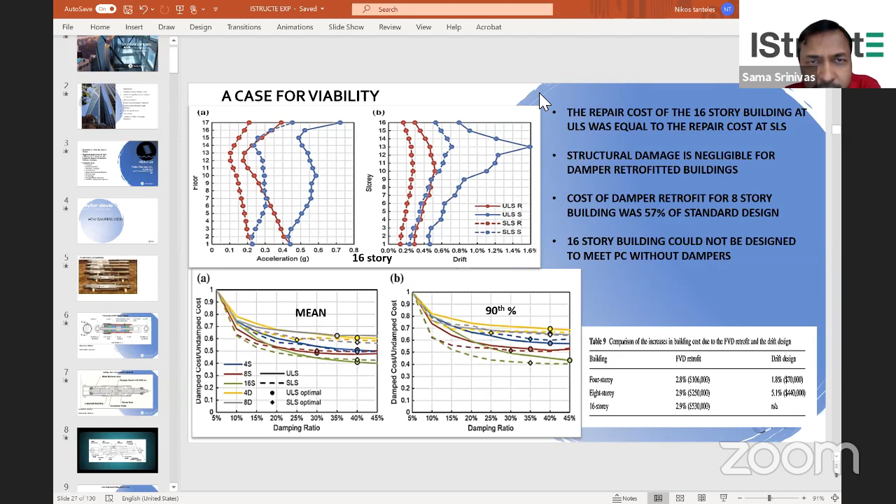So should I stop sharing? No, it's okay. Thank you, guys. Thank you, have a good night. Bye-bye. Okay.